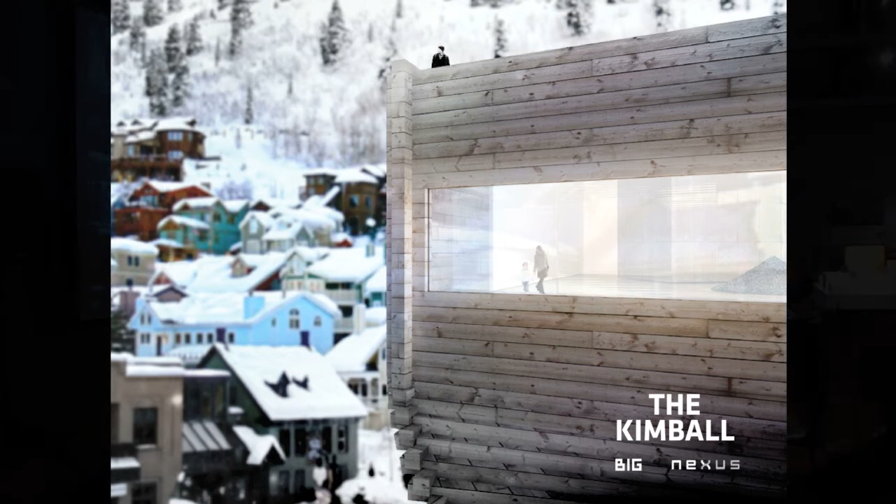Apart from us from Big and Nexus, we have been collaborating with Dunn Associates on structure, on DBFA, on mechanical installation, and vision engineering on electric, and on Big D. Miraculously, there's actually space enough for 2 Bigs in this team. Big D on constructability and costs.

We've been spending the last week doing a very necessary in-depth research, trying to sort of uncover the charm of Park City and testing some recent technology and movement. But I think part of the core of the raw charm of Park City is that it comes from this unique history of repurposing the structures of the industry of the past into the framework for life and leisure and culture and art of the present and the future.

So of course, Park City itself is the reinvention of a mining city, and as the mines dried out, the plumes of the smokestacks became the plumes of the snow cannons. Of course, like this week, we're celebrating the 10th anniversary of the Olympics. Of course, the Sundance Festival has really put Park City on the cultural map. We had the joy of participating in the last days of Sundance last weekend. And of course there's the Kimball Art Festival, and in general this former mining town has really become this sort of cultural mecca for physical culture and the culture of the arts.

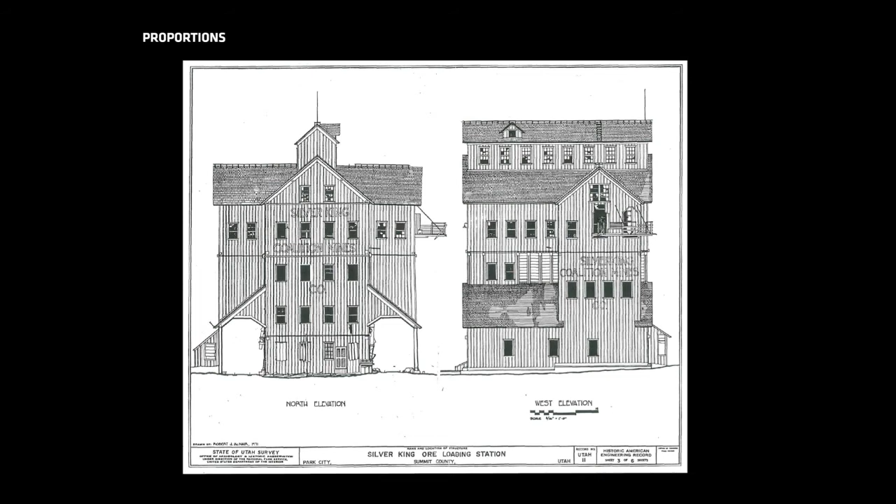It's a really charming structure - it stood 80 feet tall, and because back then the whole city was about mining, it was really the landmark for the mining industry.

Looking at the new Kimball and the program that we were given, which has been developed to expand the framework of the Kimball to accommodate more facilities, more learning spaces, and better and more generous exhibition spaces, we try to see how much space it actually is. And even though the program itself is not very big, the necessary generosity of the exhibition spaces makes it a relatively significant volume.

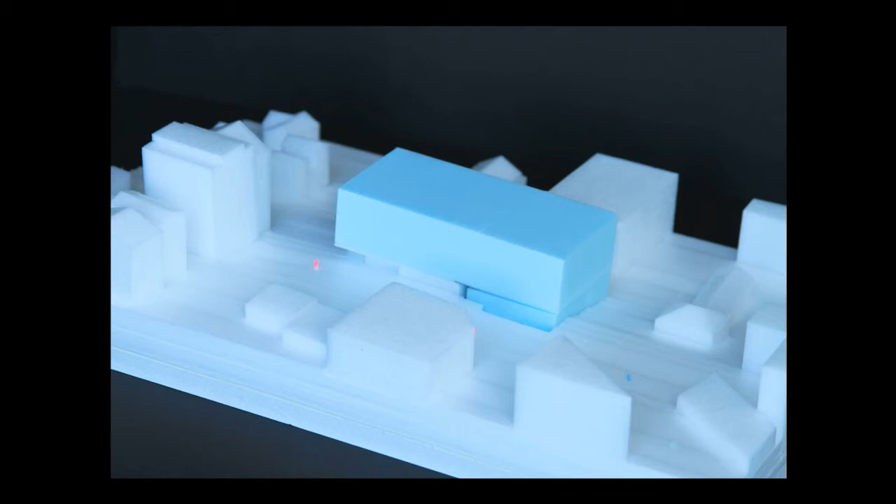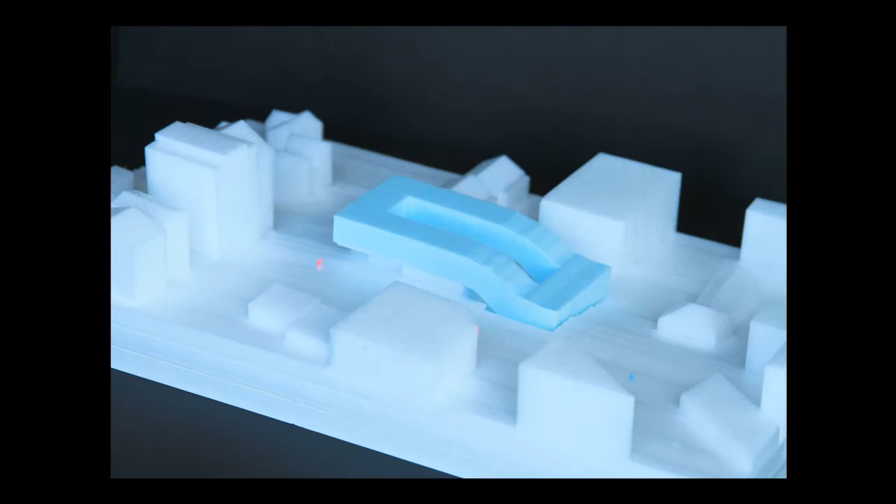If we spread it out and cover the entire existing Kimball Art Center, it would take up this much space. We could also consolidate all of the new program into a single footprint and basically preserve the existing Kimball Art Center and building almost intact. We started playing around with different ways of resolving the program, and it turned into an odyssey of possibilities - I'll spare you the trouble. But gradually we started developing feelings for something that we thought actually really responded to the unique challenges of the situation.

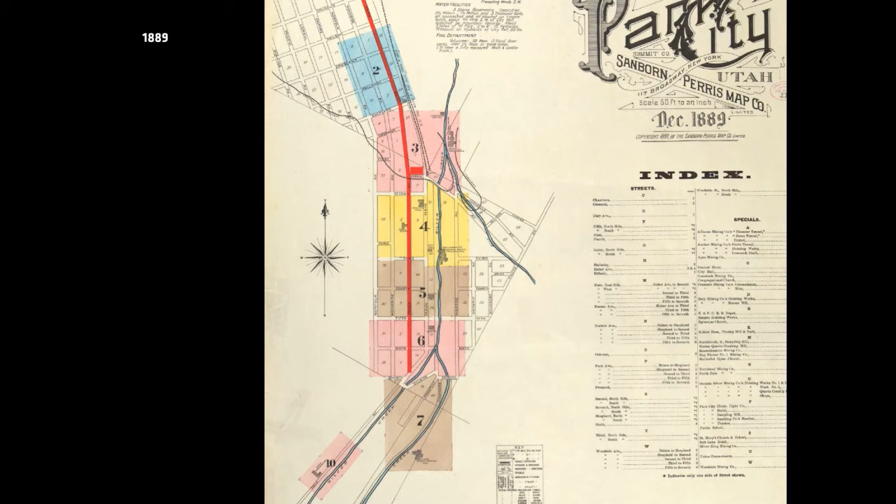So essentially, if we just go through a 30-second history of Park City - Park Avenue used to be the main street, with Kimball between Park Avenue and Main Street. As Deer Valley Drive became the main arrival point.

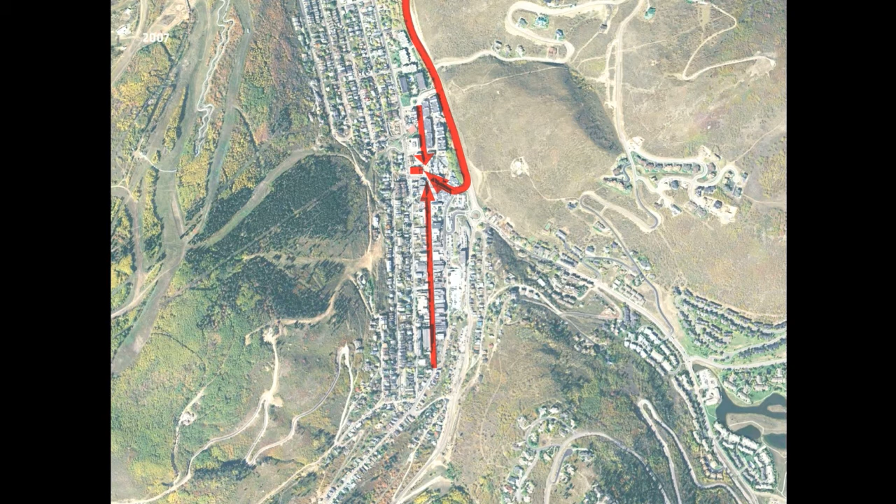When we arrived for Sundance, we actually came down Heber, looking at the future site of the new Kimball. So the Kimball today is really nested at this incredible urban node that isn't at the geographical center of Park City, but is at the cultural center and infrastructural center of Park City. And by moving the main entrance towards Main Street and Heber, it really becomes this pivoting point of the cultural life of the city.

So what we arrived at after testing all these different options is that we decided to leave the existing structure as intact as possible, and clean it up a bit. But when you have a limited budget and limited means, when you start doing massive refurbishments you really interact massively with something existing. It's almost like opening a Pandora's box of potential misery, because you never know what you're going to find as soon as you start hammering on the existing conditions.

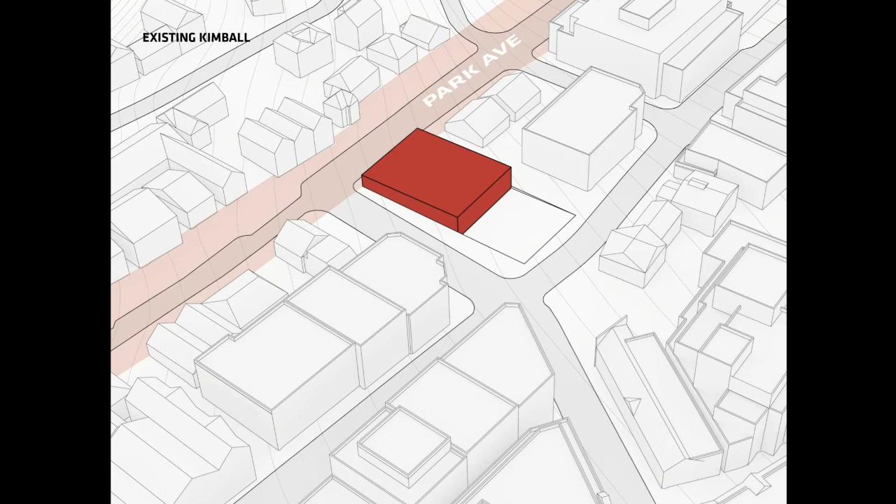We thought we'd turn the existing building into essentially the learning center, an education facility. Then we consolidate the exhibition programs, the lobbies, the arrival, the restaurant into this new concentrated building. So it becomes more like the successful marriage of two distinct entities, rather than trying to radically transform the existing Kimball building.

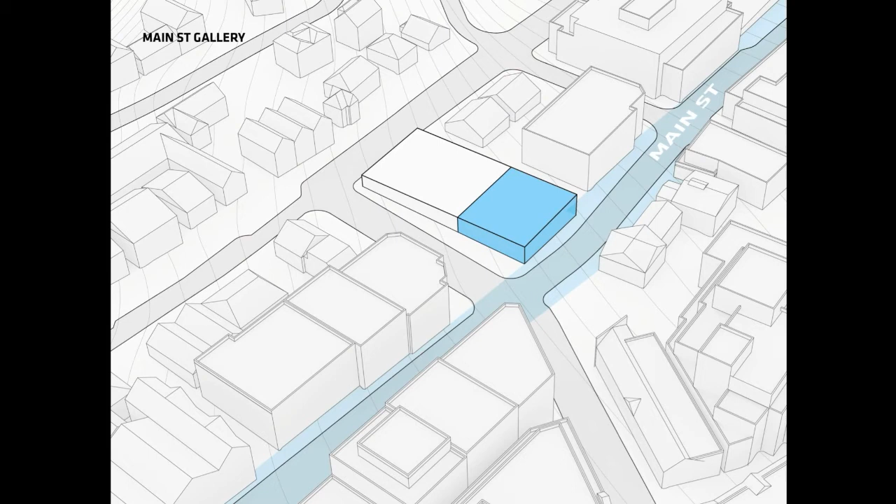So basically the program consists of two main galleries. The lower gallery we nested into the slope, aligning to Main Street, opening up for pedestrians passing by. And the upper gallery we lifted all the way to the top of the building, turning it towards Heber Avenue, so that visitors arriving to the city will be able to see into the exhibitions of the upper floor, almost like a friendly building that turns its head to invite visitors.

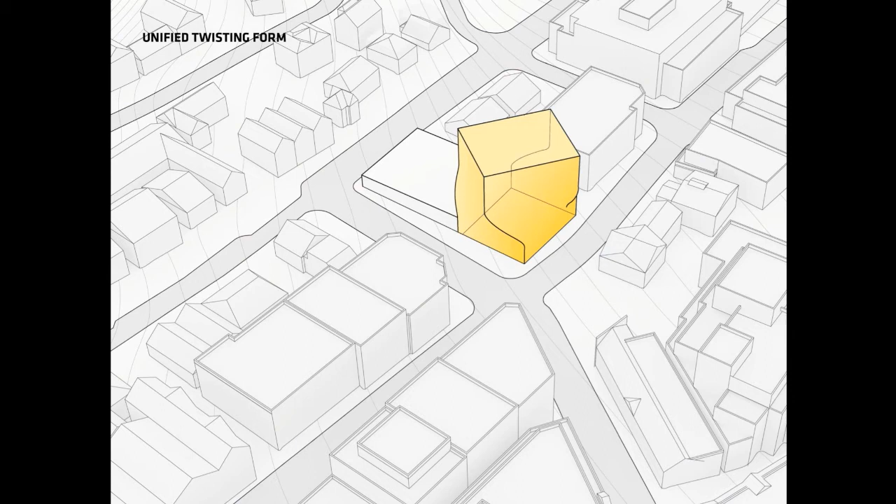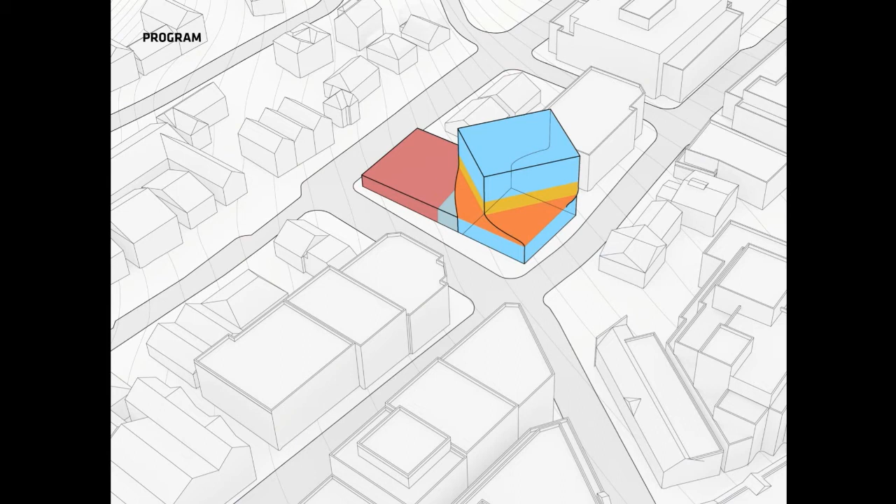And what we brought, the site model — we had to build a bigger model so we could appreciate the Kimball's presence in the urban context in the larger scope, also looking at the slopes on both sides.

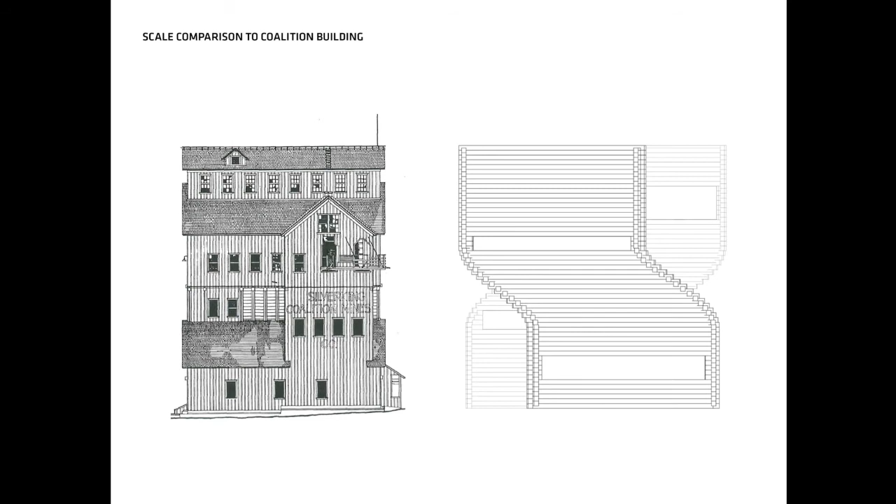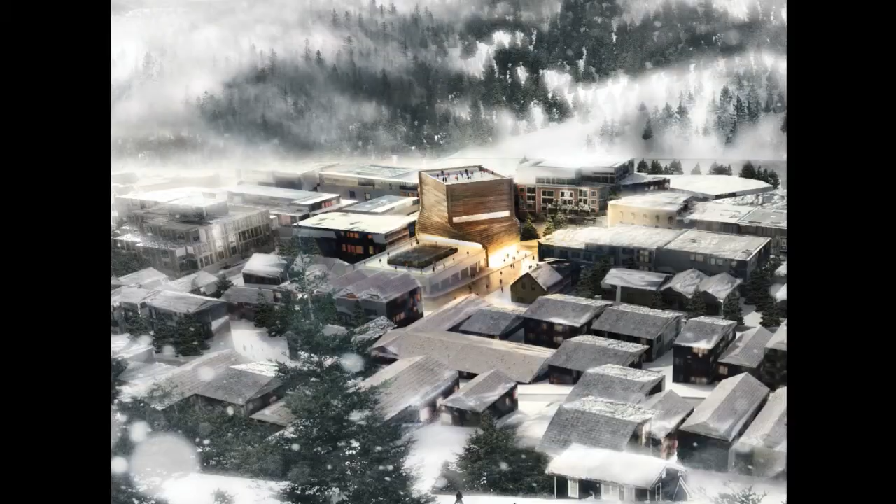And this new volume, when we stack the galleries and the restaurants on top of each other, we actually reach almost exactly the same proportions as the former coalition building. So you can say the new Kimball could really stand as a beacon for the cultural life and the art world of the new Park City, in a similar way that the coalition stood as a landmark of the mining town of the past.

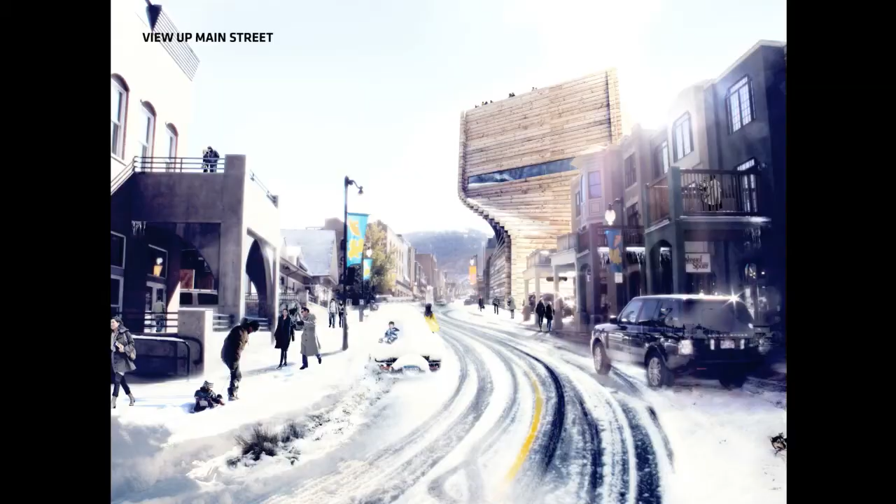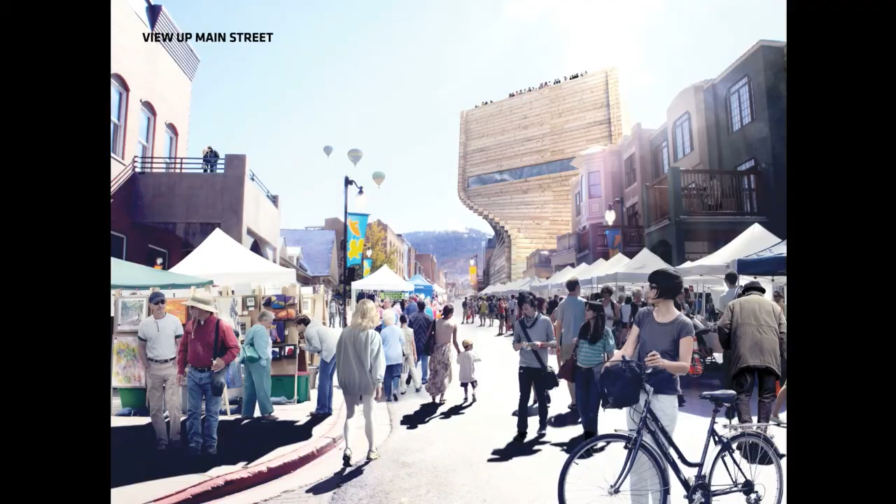This gesture of turning its head doesn't only address Heber Avenue, but it also makes the building almost peek up and down Main Street as this friendly building looking across the corner. And of course, as you arrive from Heber, you'll be able to see what's going on at the top when you come down the hill, and from the street looking into the lower galleries from the sidewalk.

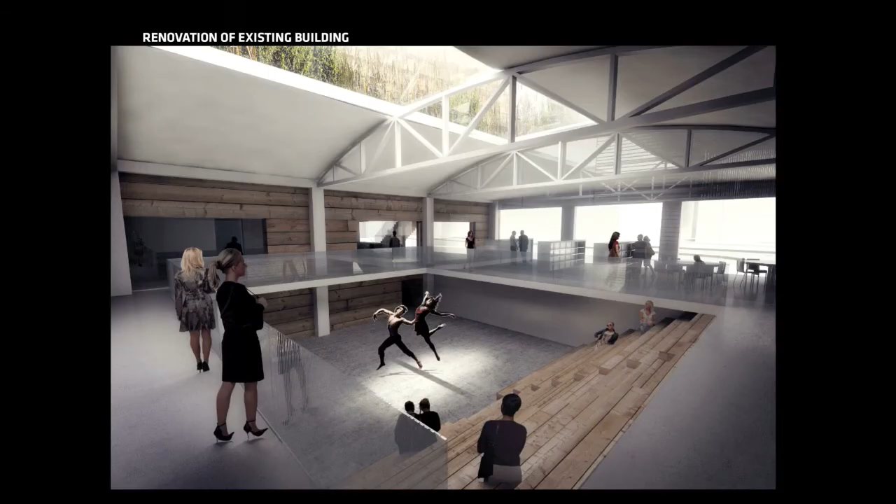So if we go through the program again: you arrive on the main lobby from Heber Avenue on the corner of Main Street. To the left, you see the series of classrooms. And then we propose to create an assembly space, like a very generous staircase that could be an informal auditorium, but it could also be an assembly space where, for instance, groups of school children can accumulate before and after they visit the museum.

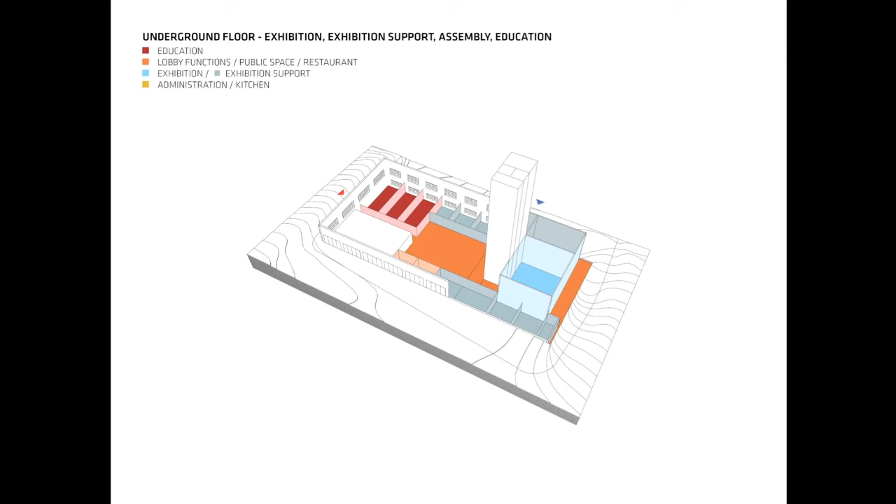This big generous staircase also takes you down to the lower floors where you have a series of support functions. Also from the alley at the bottom along Main Street, we have the loading dock that allows art to be moved straight into the lower gallery and also into the elevators.

Back up at the main entrance, when you arrive to visit the museum, you have the ticketing, you have a view down into the main gallery, and along Main Street you can follow the slope and actually come down into the big exhibition space.

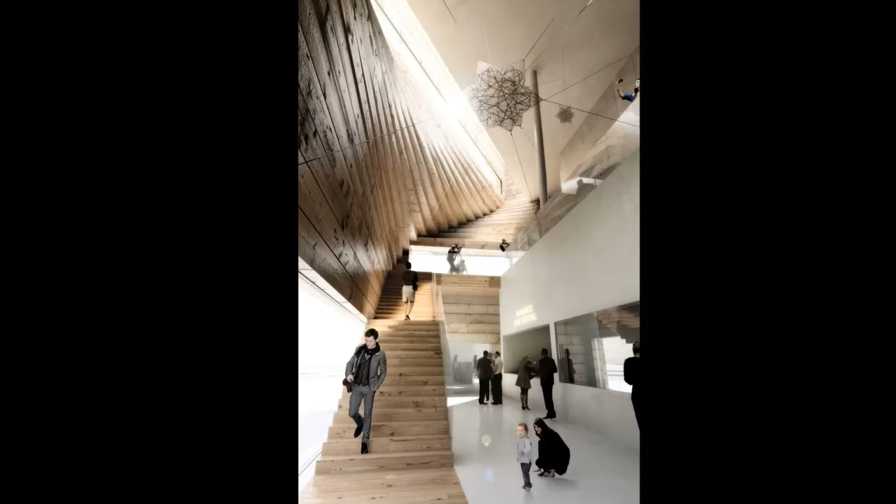Or you can take the generous staircase up in the gap between the exterior facade of the building and the galleries that stand as these two big volumes inside the space of the museum. You arrive up to the upper floor on top of the gallery where you have a restaurant, the kitchen, and a direct access to a new roof terrace sitting on top of the existing garage building.

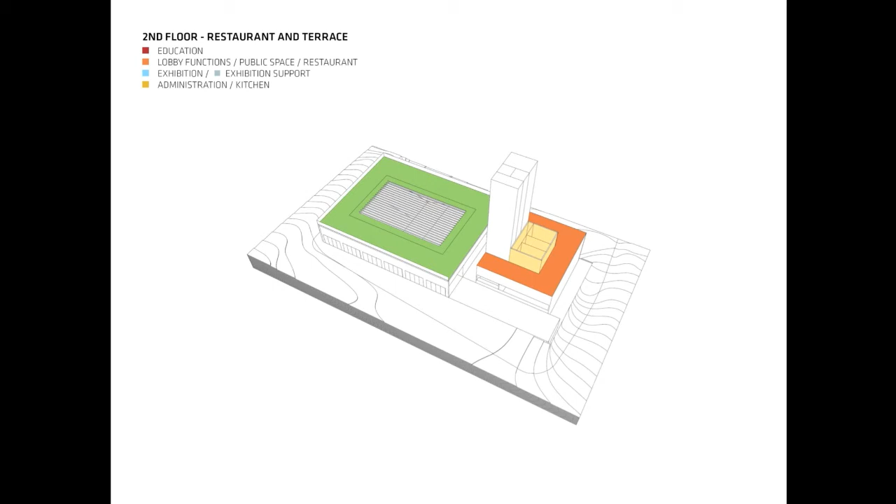On top, again, this space is very generous. So you have the back of house functions, the kitchen, and the toilets related to the restaurant. And as you move up here, you can see the generous space with the central core of the restaurant.

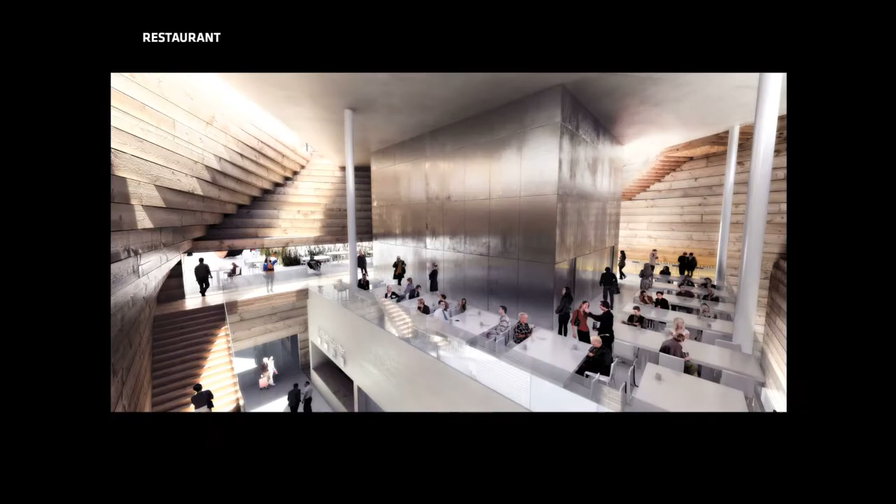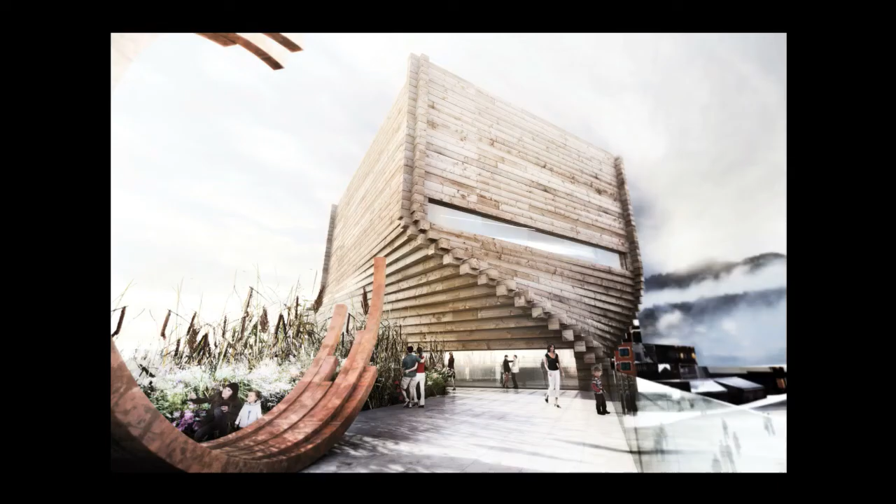People dining around the core, with the possibility to flow straight out onto this new roof terrace that becomes like this courtyard in the middle of this busy corner of Park City.

From here you can follow, again, walking along the perimeter of the building and this sort of sculpturally warping wooden wall, and come up to the administration. Visitors will simply pass the administration, but it's located as the foundation for the upper gallery. All of the staff have offices with an enviable view of the surrounding valley.

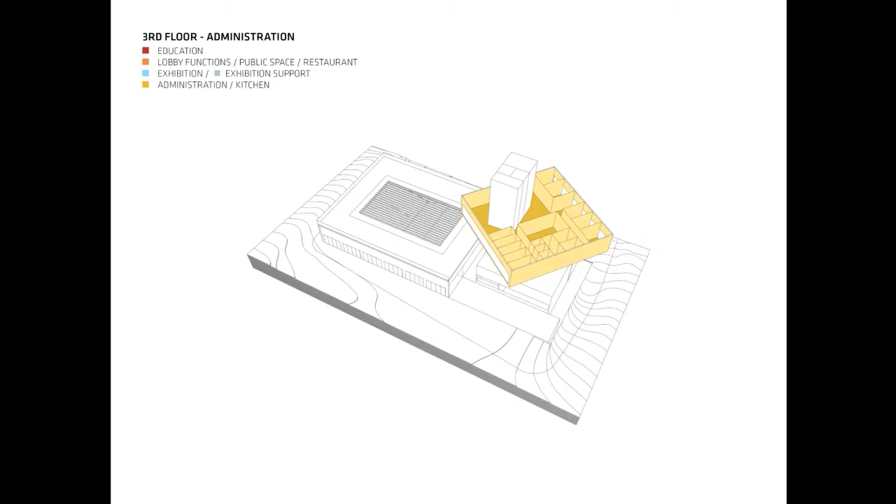Continuing further up, this stair finally arrives at the large, generous gallery at the top that has both the panoramic view of the Wasatch Mountains, but also the possibility for skylights.

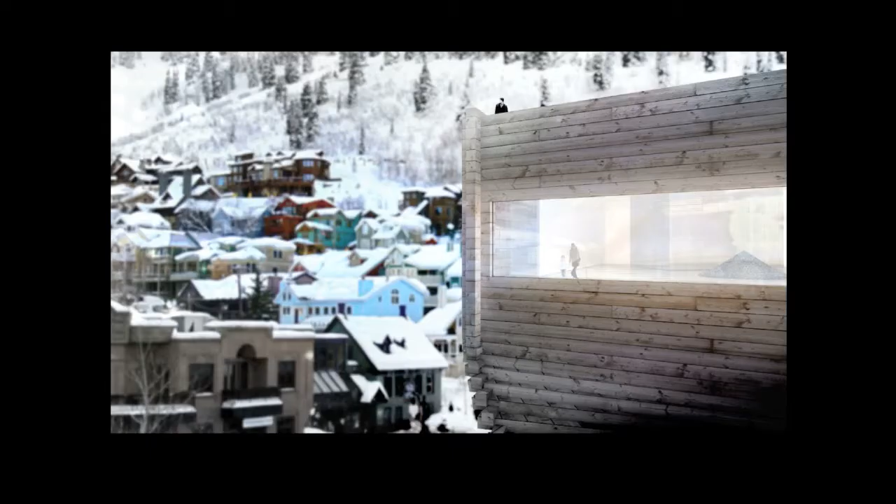From here, the stair basically continues further up and arrives at the roof terrace that becomes this incredible outdoor gathering space, both for outdoor installations, outdoor sculpture, or various events. So you can see how the circulation simply follows the perimeter of the building, gently spiraling up until it reaches the top.

And this is sort of a look into the building where you see only the wooden structure with the two galleries taken out.

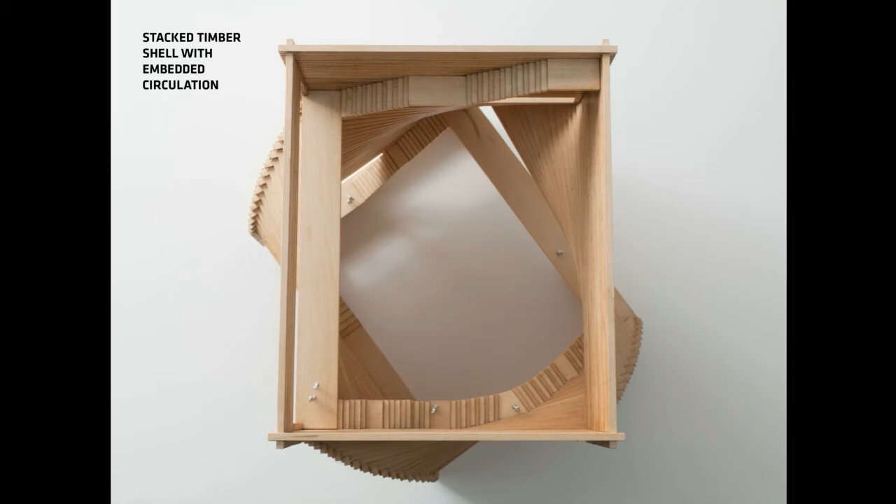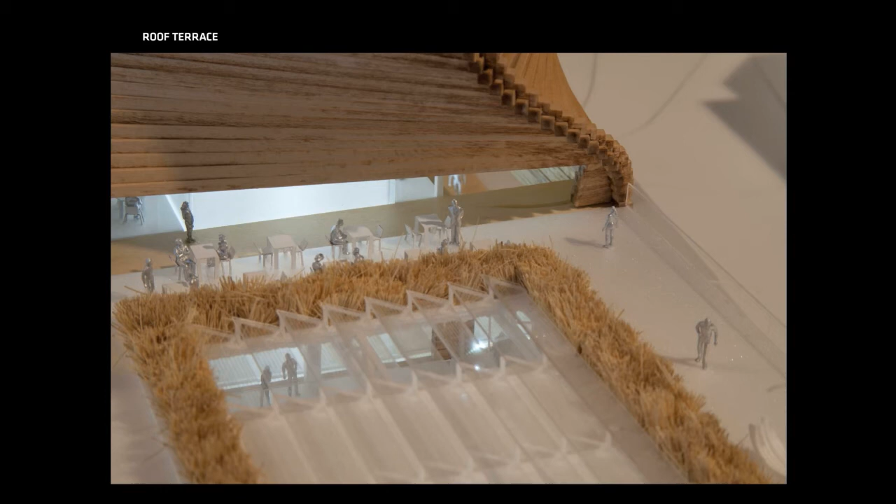We propose to turn the roof terrace into a sculptural garden, but it also has these skylights and thermal solar panels that Jeff is going to get more into detail with. Essentially this garden consists of native plants, these tall grasses you find around in the valleys, which frame the sustainability and daylight sculptures, and it becomes this big tall garden.

You have an outdoor terrace where you can move out almost like, and of course you have the loop of the sculptural garden. This terrace almost becomes a reintroduction of the generous porch where the restaurant can pull out under the canopy of the turning wooden building.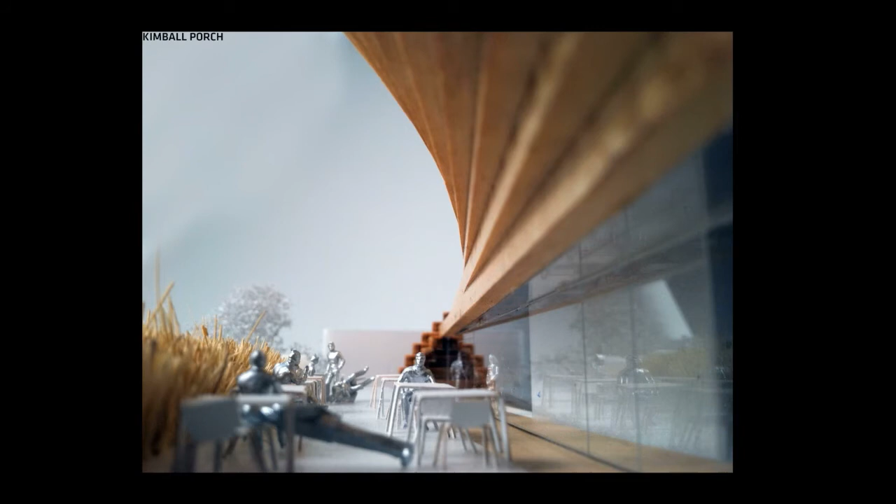And finally, this building—like a major element that creates the character of any building—is essentially what it's made out of.

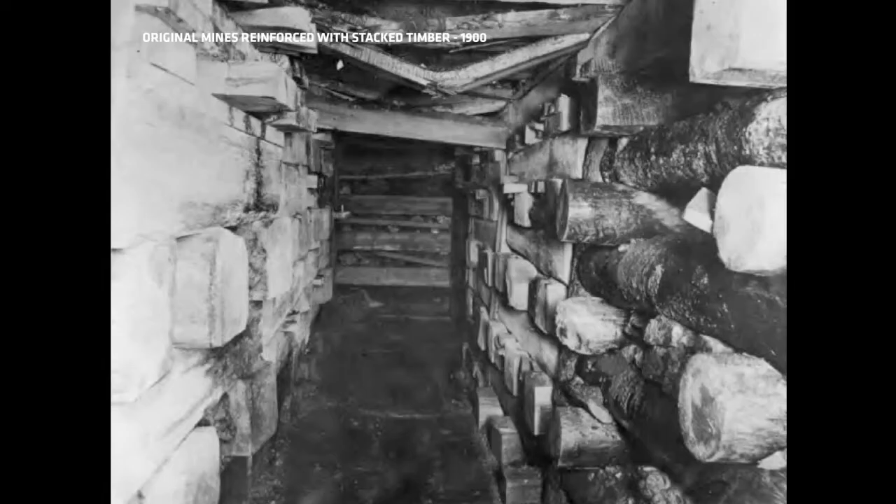Looking a bit back to the history of Park City, most of the historical structures—few of them stand today—but historically almost all structures were built out of wood. Today wood is still a very significant cladding in the city. The old mines were actually reinforced with stacked timber, log constructions of overlapping logs, and the log cabins themselves had this unique, historically Scandinavian way of building with massive timber.

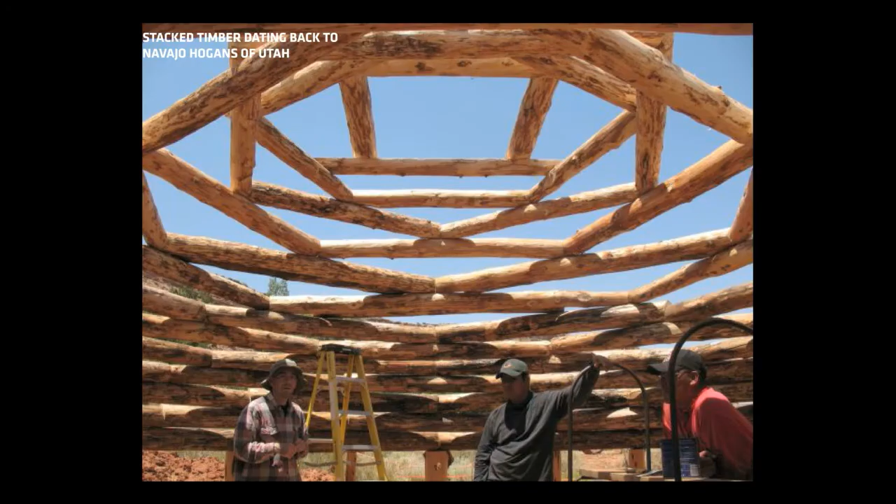The Southern Pacific Railroad used to have a train line that went across the Salt Lake, founded on wooden piles hammered deep into the Salt Lake, where over decades they practically marinated into this new special wood with an incredible rich texture. Right now there's a company that extracts and reuses these old logs, called trestle wood, and it has this incredible texture and materiality unique to the Salt Lake.

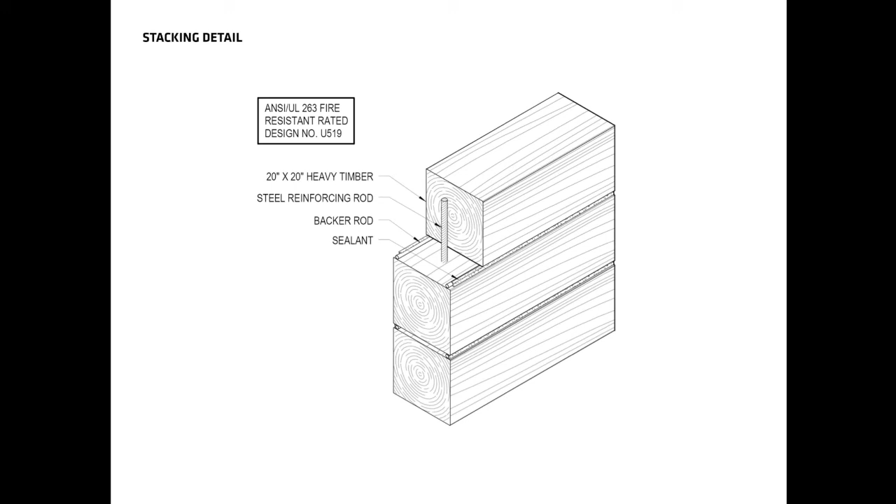So we essentially propose to use this material and this traditional construction technique. You stack the solid logs because of the massive scale of the wood—it has the depth to insulate, the strength to carry itself, and all we need to do is connect it with rebars.

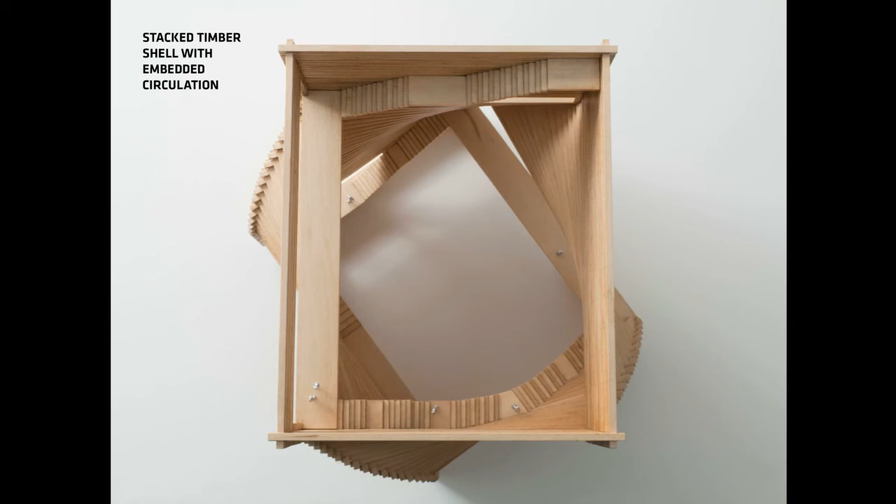Here you see the corners. Essentially, because of the depth of the wood, we can gently rotate each piece of timber as the building turns its head to look up Heber Avenue. Within the straight members, even though it's a sort of double-curving sculptural surface, it's actually made out of these straight logs—it's an inherent property of this way of building. You can call it a very contemporary expression of a very traditional material.

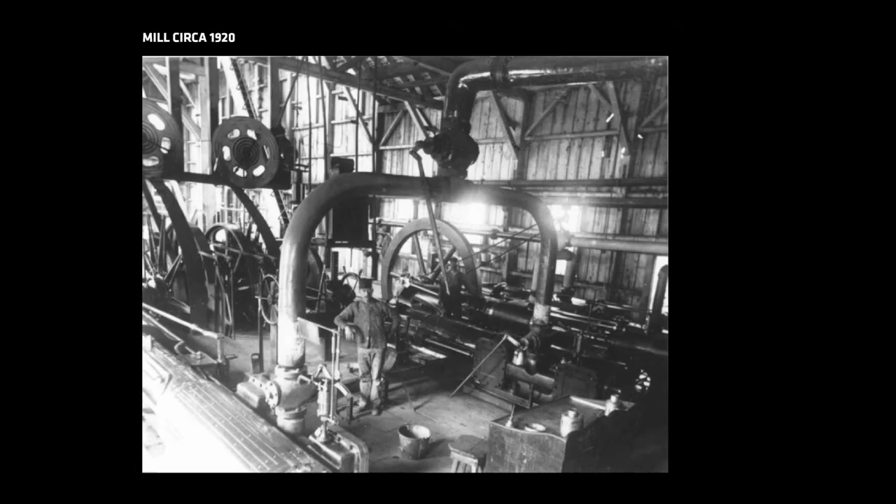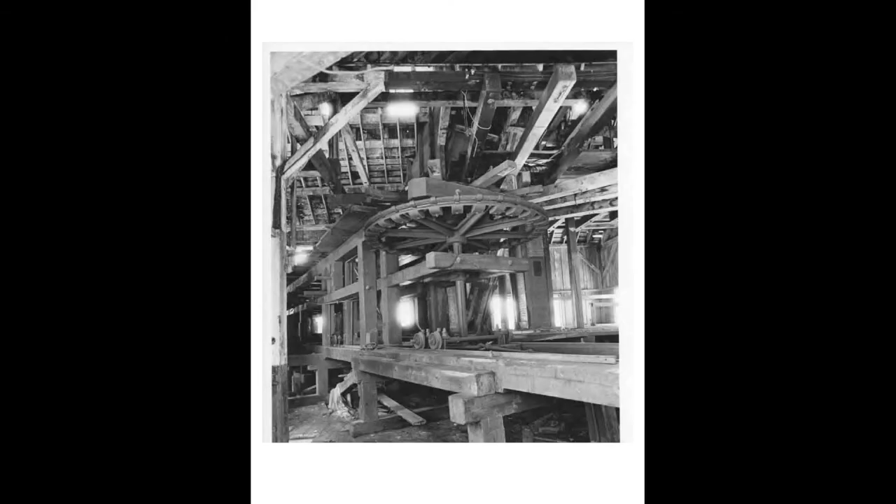And finally, for the galleries inside, the sawmills of the past used to be essentially these steel structures working inside a wooden framework. One of the really great things about this building is the layers of stories that support this concept, and inside the Coalition building you actually have this steel mechanism imagining the carts of steel or silver coming off the mountain and rotating through.

So you have this twisting motion inside the Coalition building. With this, we have the steel building on the inside with the circulation of people as if they were the cars of silver circulating through the Coalition building, creating this twisting motion in the actual design of the building.

So I'm just going to walk through a little bit of the structural and some of the sustainability issues on the project.

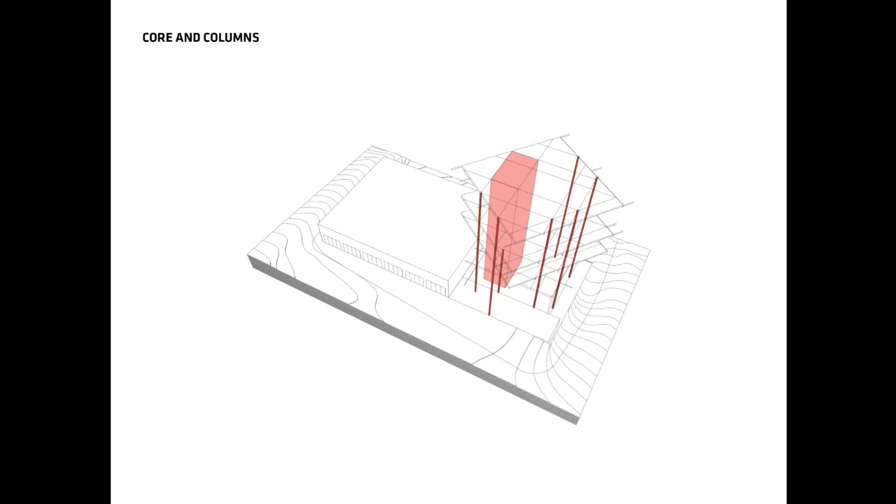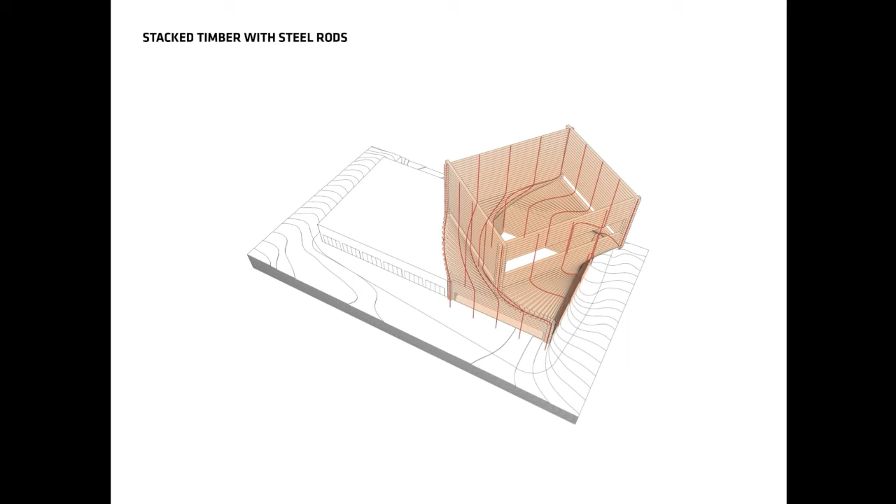The structure is really three systems: a concrete core where the elevator is, which acts as a structural element, and then you have this steel building that is built. It's really a separate building that supports itself, and then you start to bring in the circulation that goes around the building, and then you add this self-supporting wood structure that creates the twisting, elegant, simple architecture with the forces that go down.

So as you look up through the building, you see these wonderful views of this twisting wood contrasted against this steel building where the galleries sit. And then at this restaurant level, how it opens up to the light in the windows, and the light starts to filter down from above through that circulation space. And you interact with that both on the floor level and at the garden level.

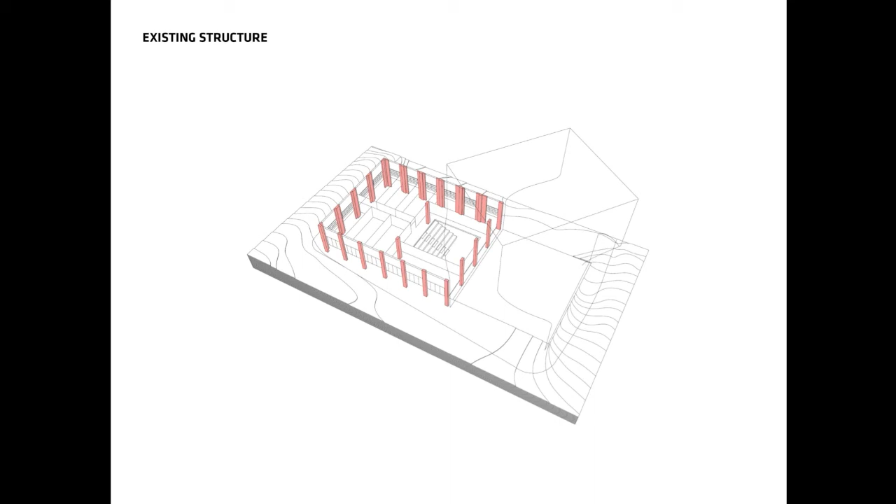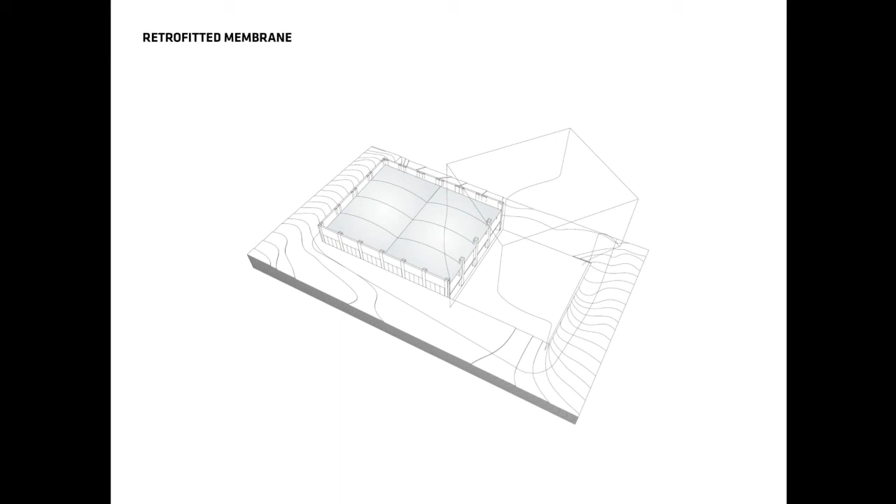So this is the structural grid of the existing building, and we build upon that and want to keep that in place. There will be some reinforcing that would need to occur, but then we want to keep these beautiful bow trusses that are here, and allow some light to come down through it, and essentially build a concrete structure for this rooftop patio that goes, as Bjarke said, the front porch that wraps around.

And then in the middle, we have this series of skylights and solar thermal, where we're heating hot water with the use of the sun, that's surrounded by this native plant piece. So when you're inside this gathering space, this assembly space, you're looking up through these skylights, through the bow trusses, and you have this connection that's up to this roof garden, and then the actual building up beyond. So from all points within the building, you're interacting with all of these different artistic elements.

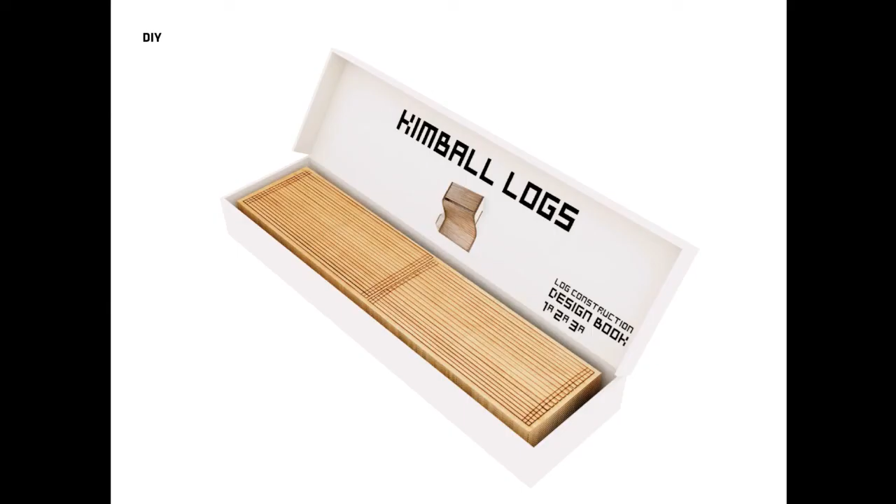One of the things that for us has been especially exhilarating about this project is that wood today is used typically just as a cladding, almost like a cosmetic layer. It's like a thin cladding on top of some kind of a complicated sandwich of rock wool and stud walls and chipboard.

So it's really been reduced to a sort of cosmetic veneer, or almost like the image of wood, whereas in this case we really have the chance to work with the physical, material, tactile, tectonic qualities of real massive wood, and in this case real massive wood that has been marinating in the salt lake for decades and become almost like a new kind of material. So we literally, when we built the model, the large model, we built it exactly the way that you would build it in real life, with the individual logs overlapping log by log.

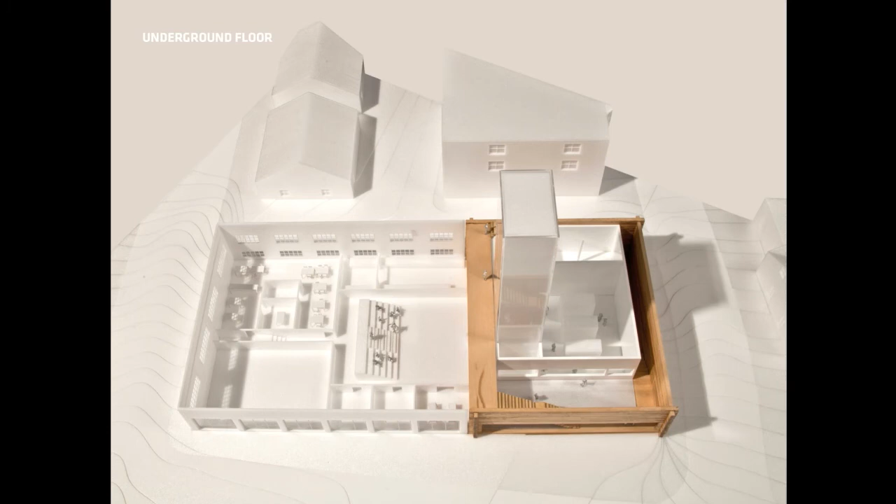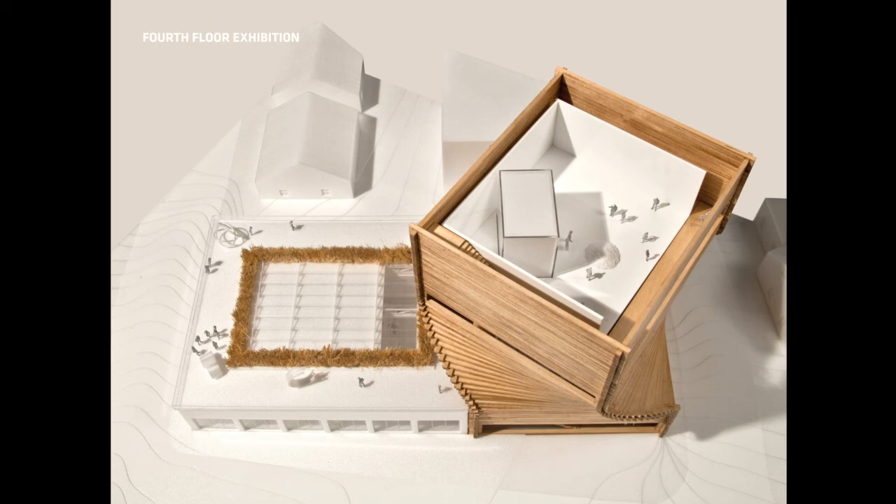So here you see the learning center to the left, and then the art museum with the galleries, and the turn that happens around the public space in the middle, and finally moving all the way up to the top. So essentially, it is almost like a physical material sculpture where the surface on the outside, the surface on the inside, and the core within is essentially exactly what you see is exactly what it is.

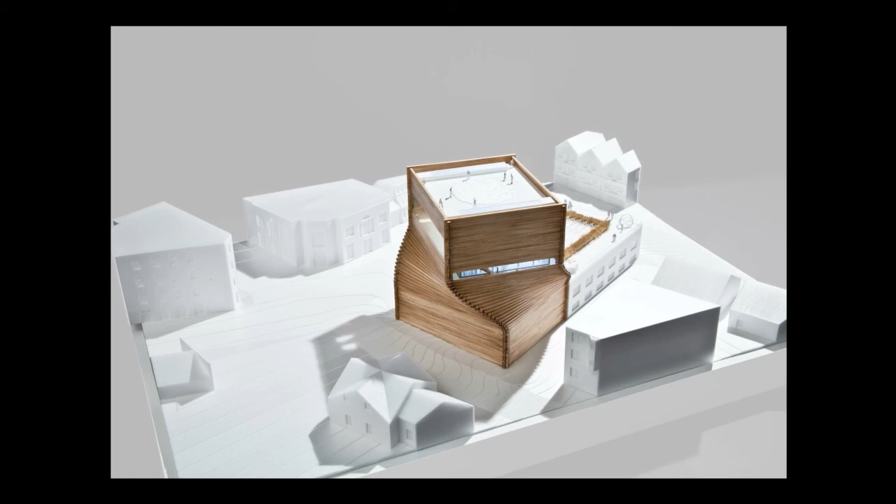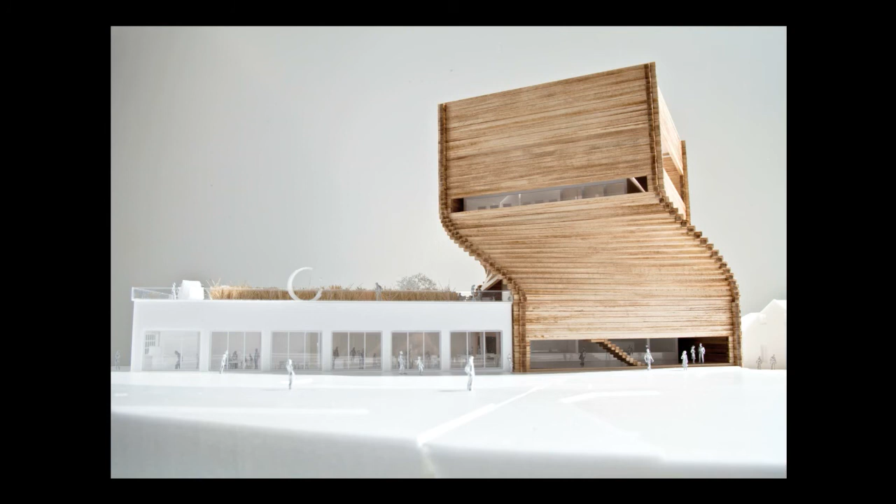And for an architect today, that's a very unique opportunity to do something that has such integrity and such authenticity because of the complicated nature of contemporary construction. So in a way, again, getting allowed to build something that is really truly genuine and at the same time has a very strong artistic expression.

Yeah, so just to look through some of the plans, we really started out with the grid of the existing building and then built upon that grid and extended it through the new building. So you can see that we just extended that through.

And then this gathering place, just to note on that again, it really becomes a place where you can bring in groups. For example, a school bus shows up with a group of kids and they come in and you need a place for them to gather and maybe to introduce what they're going to see. And you can move right from this assembly space directly into this gallery or directly into the large freight elevator or the smaller elevator and go up to the upper gallery.

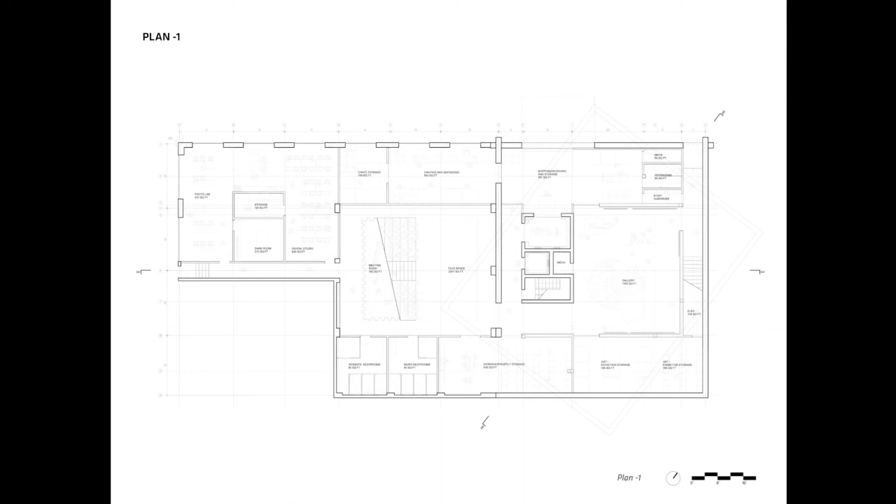As well, there's just some of the details, there's a separate staff entrance with almost a coat room where they can drop off their things and move directly over to the elevator and get right up to their space. And then on this main level, we have really the education piece over here, and we have these movable walls that separate to make the art studios really flexible so that you can use it for different uses or different sizes at different times.

One of the really great amenities, though it's a little difficult to see, is these doors that open out onto the street, right where the main entrance to the Kimball is. Imagine artists during an art festival having all their supplies, whether welding, painting, or sculpture, being able to do the art out on the street, interacting with the people.

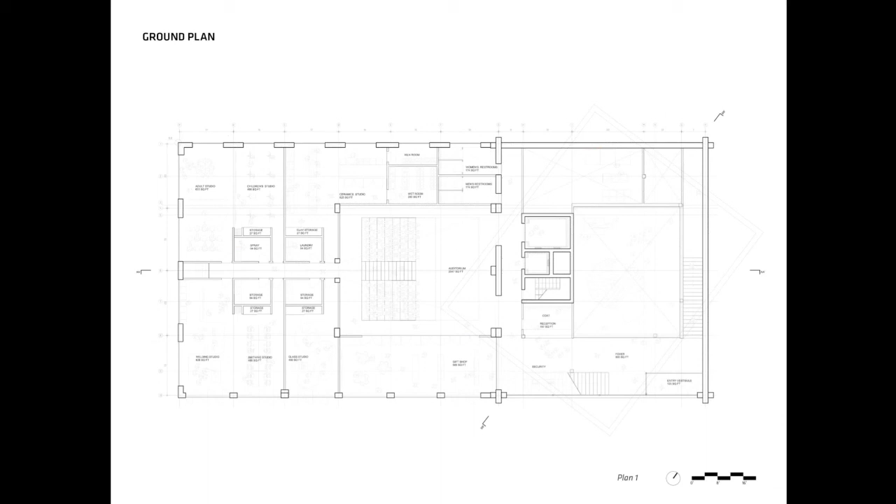Yeah, it's this other layer of the festival. And so again, we've talked about this roof garden that opens directly into the restaurant area, some restaurant service space, and then the offices around the perimeter that have these great views out, with really the heart of the office, the interaction piece, around this core where people are circulating and right off of this large boardroom, conference room.

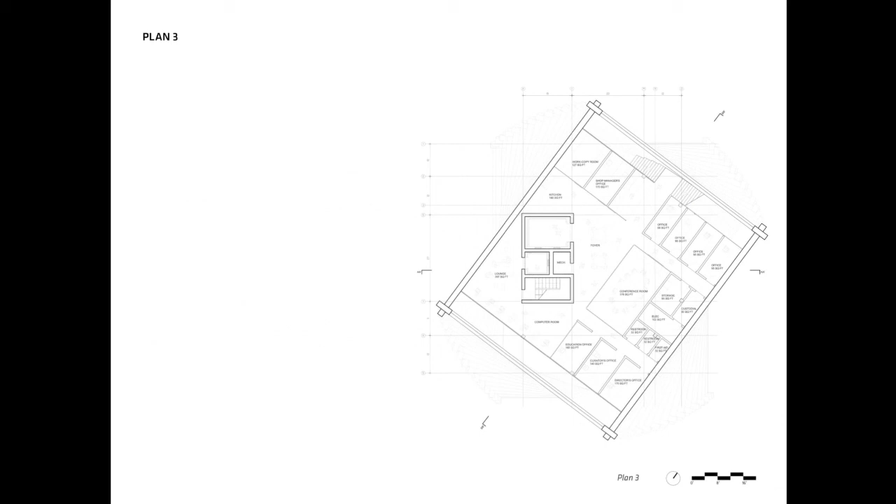So the heart of the activity in the administration is there at the center. And then the upper gallery with free spans, completely open, very flexible, and of course the upper roof garden that has these great, incredible views out across Park City. So just to reiterate, here's that gathering space where you can move right over to the elevator and go up, or move beyond it over into the main gallery.

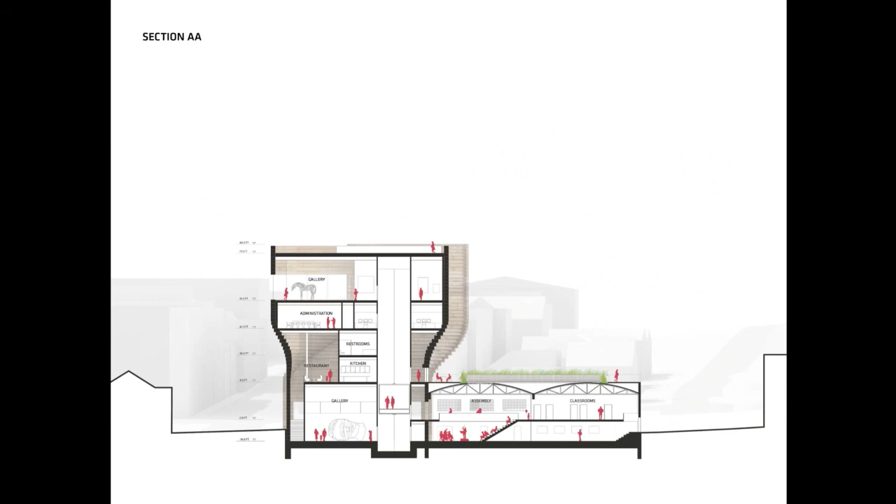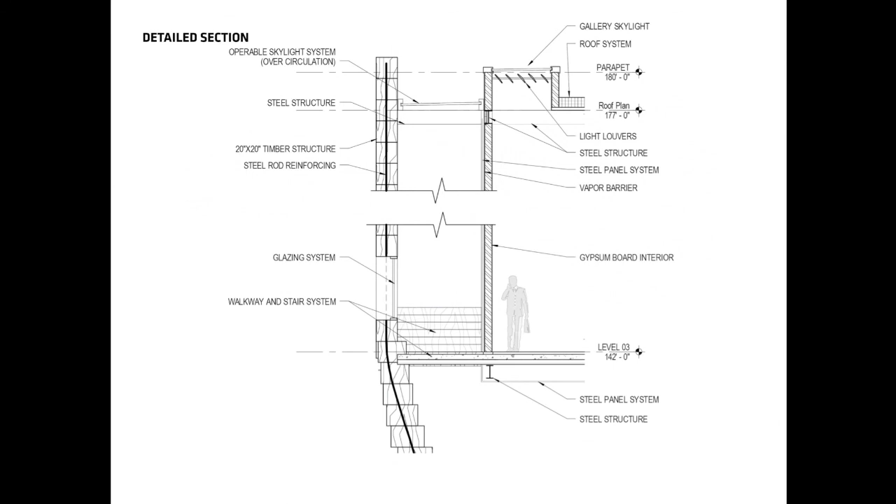The existing trusses, the light that comes down through, the generous galleries. If this wants to be a world-class art center, it really has to have these high spaces to accommodate those types of things. And then we went through and really got into the details of how this actually works, how the structure works, how it interacts with the existing building, how it creates this light well that lets light down through the circulation space.

That really then spills all the way down through the building. You can see it up there at the top as it spills down through that circulation space, creating this great play of shadow and light with the twisting form. So it's really the preservation of this existing building with the twisting form.

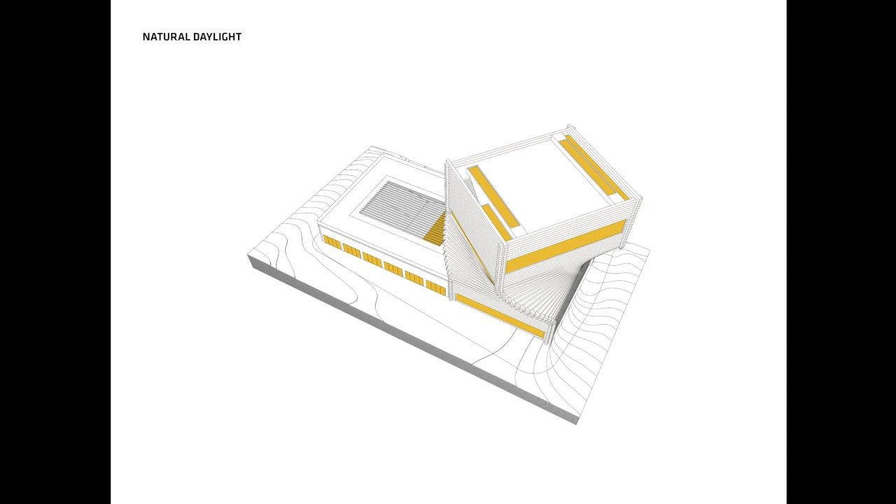Natural daylight, skylights on the top, nice open windows at the street level so you can see in, see what's going on. Some cross ventilation, utilizing the cool evenings and cool nights of Park City to flush the building out at night and disperse the heat during the summer, so that it's already charged in the morning when the heat comes in with the cool air inside.

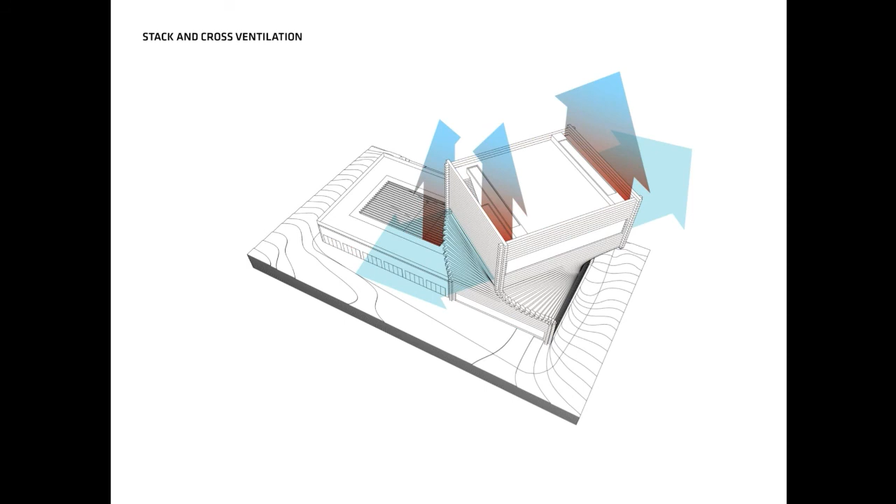A great energy savings. The solar thermal generated off of this area where the skylights are has a radiant floor system potentially that goes through the areas that don't need the humidification for the art. And then there are several different options we've explored with the engineers about a ground-coupled heat exchange system where we bore these holes down into the ground and utilize the ground's heat.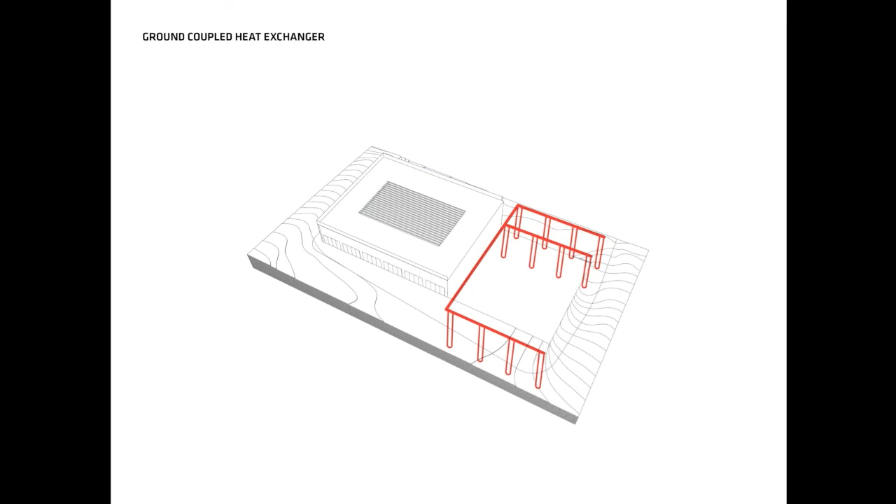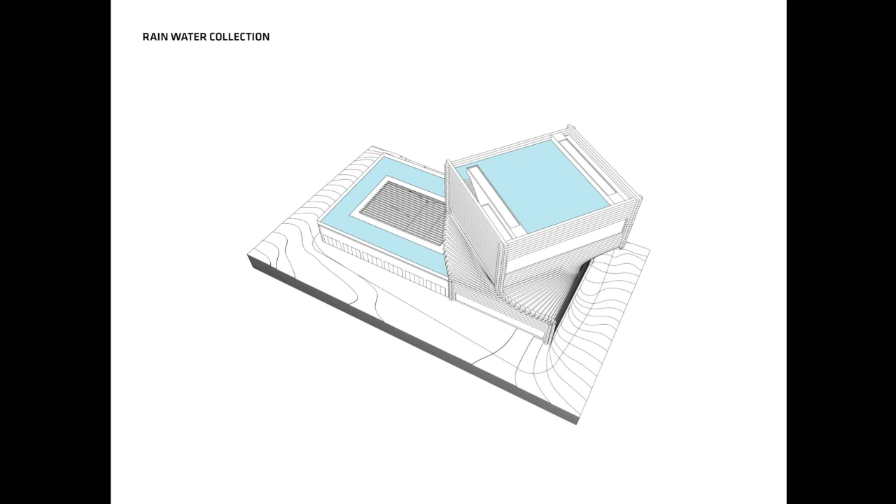And then rainwater collection. In Utah, this has been an issue that's gone back and forth in the legislature. I was involved with my partner in putting on a presentation about it, but there are two obstacles: there's an upfront cost that we really need to analyze, and then there's the process to go through to get the approvals through the state. But we think it's a great opportunity to incorporate that.

So you really have this iconic building that speaks to the culture. And then maybe just to sort of recap what hopefully, in our fantasy, could be a visit to Park City in a handful of years. This new citizen that at the corner of Main Street and Heber turns its head and looks up and down the street.

A visit inside where, almost like, you can actually look into the exhibitions in the lower gallery already from the lobby, or you can start exploring this new communal space that at the courtyard really is a space where people can come, essentially without necessarily being drawn towards the art, but simply because of the generosity of the space as a place to meet.

The extension out on the roof terrace, and the continuation up to explore this sort of amazing gallery and the amazing new space on the rooftop at the heart of the city.

And of course, it really will be the first and last thing you see when you visit Park City in the future. So you can say, in a way, you can see it sort of recreating the silhouette of the Coalition building that until recently stood as a beacon of the mining heritage of Park City, simply in this case by recreating it as a landmark for the art and culture.